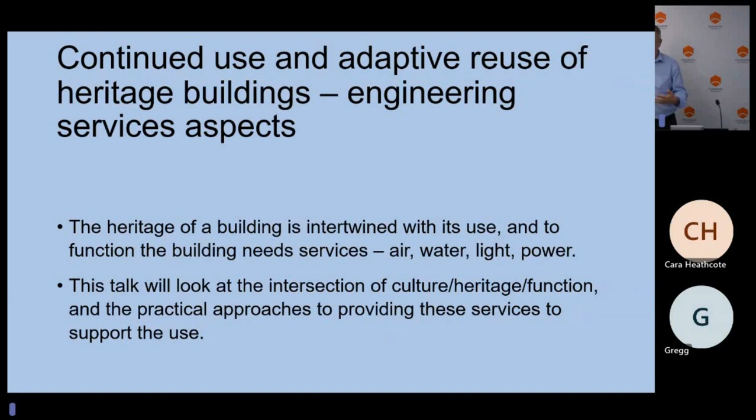So as I said, human use is connected to culture. So when you use a building, the use of that building—how you use it and what you use it for—is an expression of your culture. And I'll give some examples of how that works.

As I've mentioned, heritage is about aesthetics as well, and something is beautiful, but that beauty is part of its use, in fact. And then finally, and very importantly, heritage has got a lot to tell us about sustainability.

Some obvious cases of it: in terms of sustaining an object with its embedded carbon and its value, you keep that operating for longer periods of time. But also, heritage buildings tell us a lot about how to build environments that do last for hundreds of years. So there's some important lessons there.

In terms of some of the engineering approaches—and architects as well, I'm sure, have the same thinking—when you're trying to look at a building and sustaining its function, there's some fundamental approaches.

Number one is do nothing. And that sounds a bit ironic, but people knew how to build buildings, right? Buildings have been built for thousands of years. They are capable of their function. They have ventilation, even if there's no fans. They have light, they have water. So these things are fundamental. So often you can work with those things and do nothing and live with the outcomes.

But sometimes you want to add amenity to a building, to add to its function, to allow it to be reused in more modern ways, or ways that will extend its lifespan. So you try to hide things, and I'll give you some examples of that.

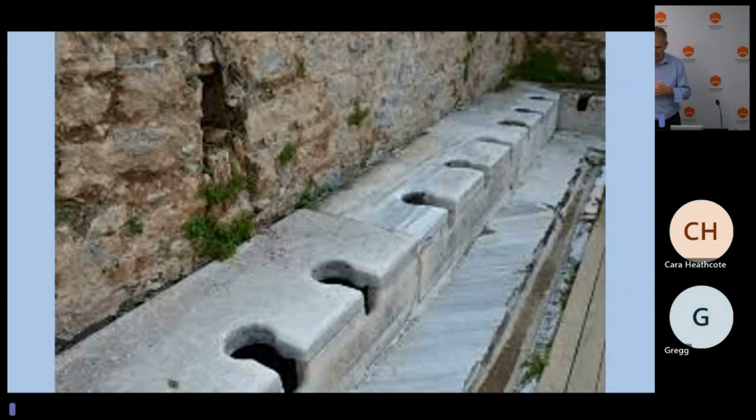So in the 'do nothing' camp, that's a Roman ruin at Ephesus. I wasn't involved in that project before my time, but it illustrates that people knew how to build buildings. The fundamentals of how buildings get used don't really change, though the aesthetics might be a bit different.

One of the key building services is hydraulics, or plumbing as it's more commonly known. The essence and fundamental physical properties of plumbing go back before the Romans, but the Romans made great advances in it. The technology and principles, if you look at some of the pipe work, are still there today. Hydraulics is probably much more of an art than a science, because it uses those physical properties and rules of thumb that have evolved as the craft evolved.

But obviously some structures don't have the ability to have the amenities that you might want in that facility, so those amenities can be tacked on. I'm sure you've seen examples of this—churches are a classic example where you have the amenity block out the back. So you sometimes have to tack things on to provide the amenity you want.

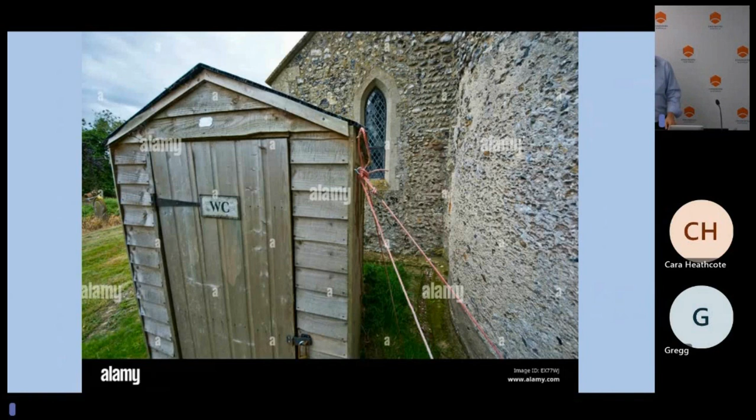So what did we do here? We put in air conditioning. The beauty of what we do, a lot of it, is nobody can see it, nobody can hear it, nobody can feel it. If we've done a good job, nobody knows it's even there. That can be frustrating sometimes, but it is a great success.

Again, I talked about do nothing. This building, in fact, was a huge thermal mass, so even in a tropical country like Thailand it actually maintained very stable conditions. If you have a diurnal cycle of temperature in a large thermal mass building, the temperature tends to remain at that average constant. So to air condition it was about just trickling in a small amount of air conditioning—we were able to maintain quite comfortable conditions so the people in their fancy uniforms wouldn't get too sweaty. Obviously it wasn't 22 degrees plus or minus 0.5, which is my point—we can live with conditions that aren't necessarily what we'd have to do in a new building.

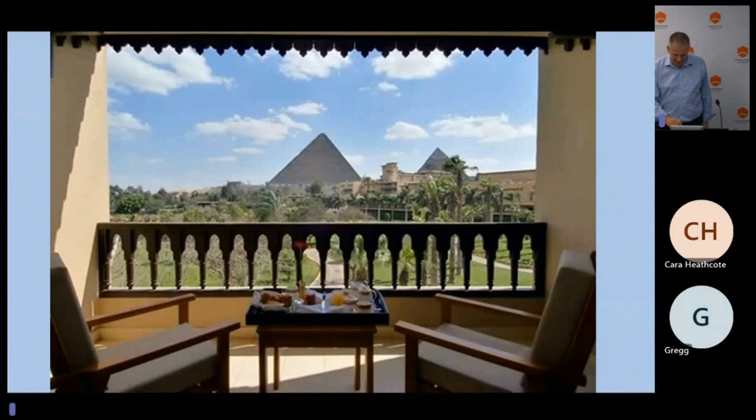This is another example of hiding. This was a royal hunting lodge in Egypt, now the Mena House Hotel, a very nice hotel with obvious views of the pyramids. In doing restoration work or adding modern amenities into a building like that, we had to reticulate power, we had to reticulate water, chill water for the cooling, and all those sorts of things. Where can we put those sort of amenities running around in a building? You can just see in the background what the facade of the building looks like.

Again, the answer here was—you'll see that wooden balustrade, underneath that's a masonry structure. Within that masonry structure, you wouldn't believe what we managed to squeeze in. All of that contained a lot of the main power reticulation, and water reticulation actually ran along inside, because that was an element that we could touch. It was not original heritage—it was stuff being reconstructed as part of the hotel works. The building had been a hotel for many, many years, but this was a restoration, trying to bring it back to a more sympathetic arrangement.

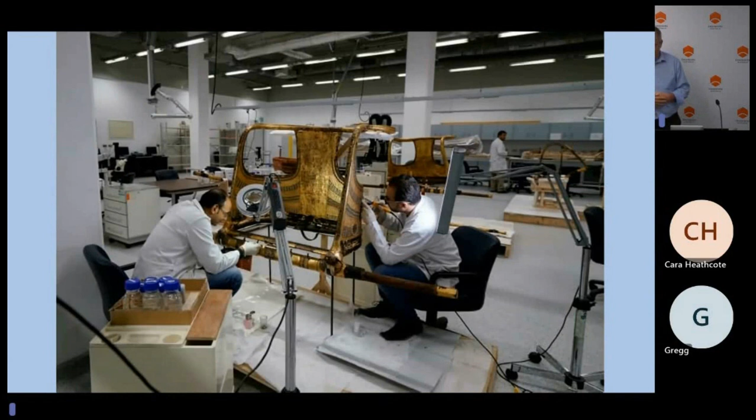Slight segue to another project I was involved in, talking about Egypt. This was about 15 years ago, I calculated, that I started working on this project. I left after only a few years on it. I did check the website - it's not finished yet. These things take time, and it was a huge exercise.

The Grand Egyptian Museum is one of the largest museums in the world. It has a ridiculously huge amount of artefacts. In the old museum, the artefacts that had been discovered were then lost because they all went into the basement - some were literally buried because the weight of other activities had pushed them back into the ground.

So the new museum is under construction. The first stage was to build facilities for restoring and storing the antiquities. The design life for this building was multiple hundreds of years - I can't remember exactly how many. That was a very powerful message, to think in those terms, because the people who built buildings hundreds of years ago probably didn't have a design life criteria. But when you do have one, it really makes you think about what you have to do to make a building last for hundreds of years.

And that's the sustainability overlay. So how do you preserve antiquities? Well, you bury them, right? This building was buried under the ground near the pyramids where the new museum was going to be. It didn't need air conditioning - the little ventilation it had came in through a labyrinth system through the earth to be cooled down. Certain areas did have air conditioning, but that was the general principle: very little mechanical ventilation and no cooling.

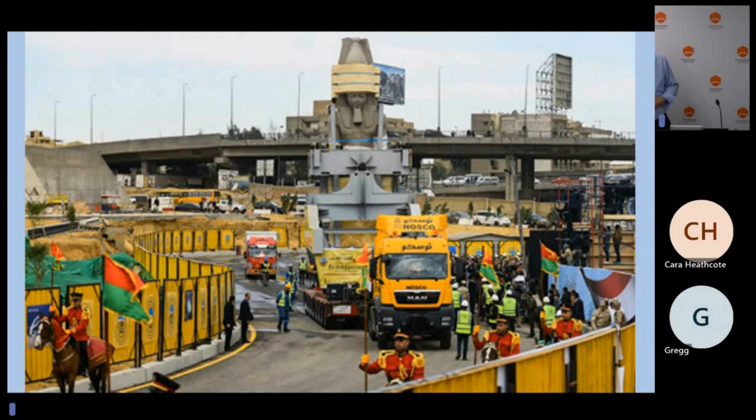As some of us have mentioned, to understand a building and work out how you preserve it, you really have to dig into its bones and understand its history. So the chap showing me around the railway station said, 'Do you want to look at sub-basement level 1 or whatever it was?' I said, 'I don't see that on my plan, so it doesn't exist.' He said, 'Yes, it does.' So he unlocked a door that said no entry, confined space.

I shouldn't say that, but anyway, we went down the stairs. Yeah, Chatham House rules, yeah.

Went down the stairs and there was this refrigeration plant from the early 1920s, which was established to provide cooling for the fruit and vegetables and the freight going through the railway station. To my knowledge, it's still there — a coal-fired refrigeration compressor sitting in the basement.

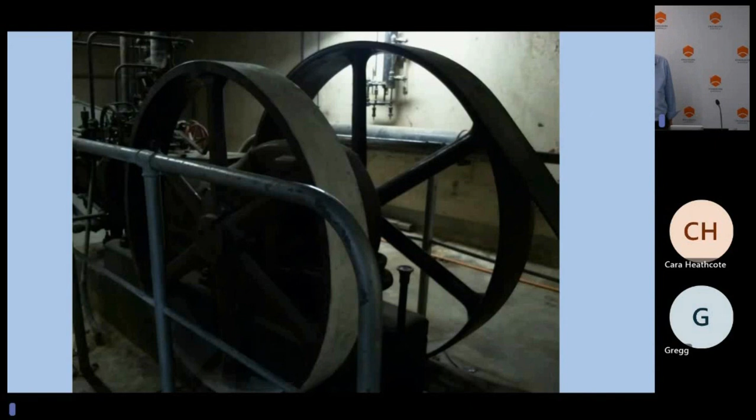Those fans are still there. They've been moved around a bit, but largely they're there, and the ducts are still there too. Obviously, it's been modified and changed.

Now, the lesson here is about understanding the culture and history of a project. When this project happened, the rail line said, 'If you're going to build above us, we need to keep operating — you need to provide fans because we need this to operate.' So the developer on top had the problem of the fans, that was their problem, right? That thinking and mentality is still there today, and those issues are still being unpacked.

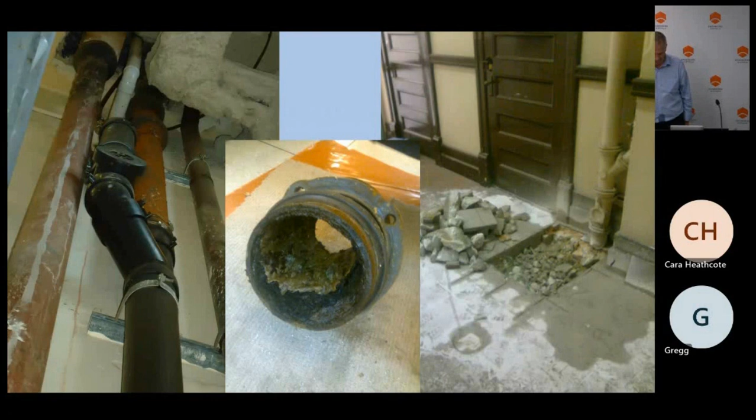The other interesting thing about theatres is they have a certain form because that's their function, right? There's the entry foyer, the rake seating, the stage — which are remarkably large when you actually get on them and see how they work — and there's the backstage.

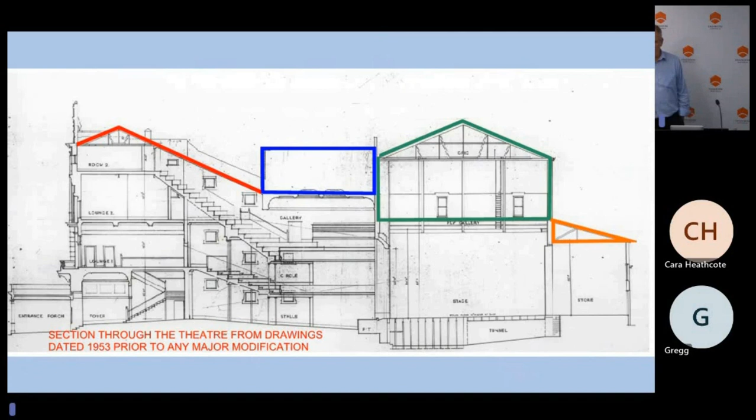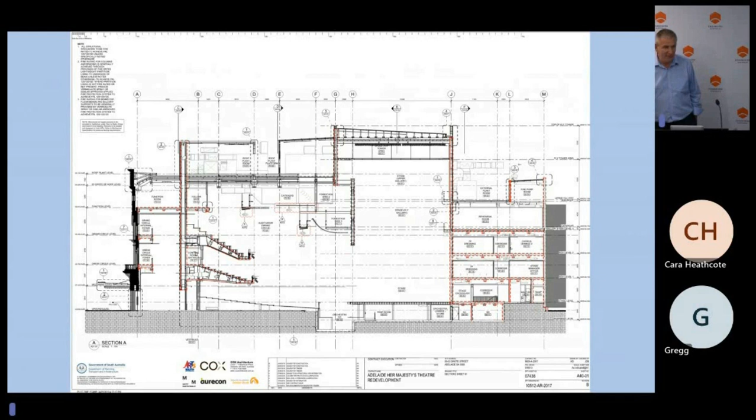So to make this work as a modern theatre, a lot of things had to happen. The seating had to be improved, the staging had to be improved, the backstage area had to be radically changed. So what was kept? Well, that front facade was kept, and the eastern facade was kept, as you can see in that grey area, and pretty much everything else went.

But what was the choice? Before this project, we were involved in the HMT about 5 or 10 years before that, and it was at the point where it could no longer function. The fire brigade was saying this is unsafe, you cannot put 1,200 people in this building. It's got wood, it's got no fire protection, lots of things wrong with it. So we did various upgrades to keep it going, but for it to have an economic life, it needed to be relifed so it could operate.

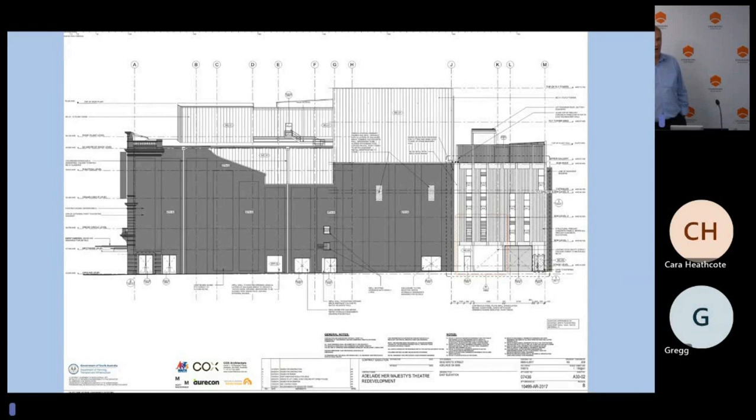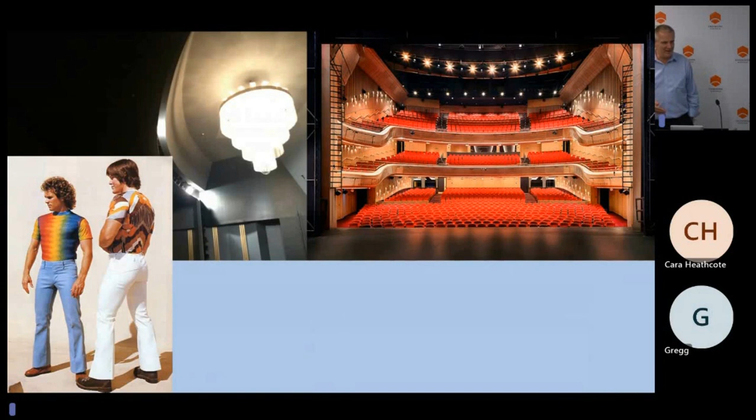There's probably all sorts of different opinions on whether that's the right or wrong thing to do, but it can be done in an empathetic way so the life and culture of it is still there. The interiors still look and feel like the interiors, unlike the 1970s overlay that was there before, because it had its original look and feel. It had been changed and modified to a different aesthetic, one we probably don't appreciate anymore. And now it's been brought back to that aesthetic.

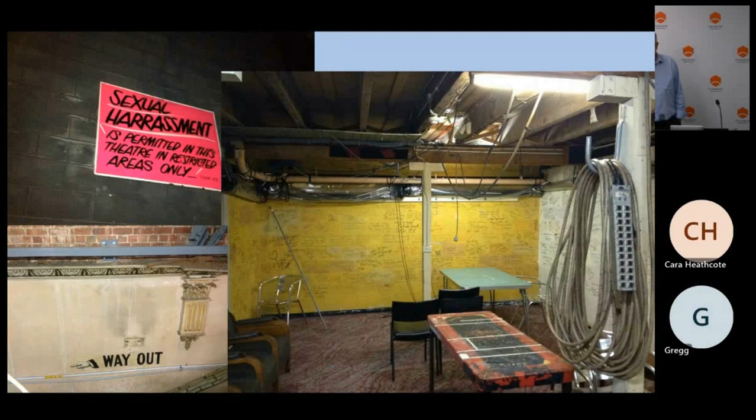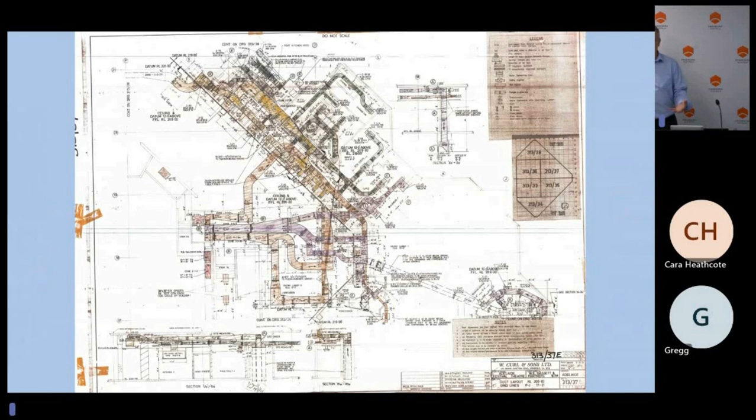This is another example from Adelaide Festival Centre, where again you see why a theatre looks like it does and what the shape of it is like. From an engineering point of view, physically going down to the bowels of the building, opening up the plan drawer and ruffling through all the drawings to find these hand-drawn 1970s drawings was a fascinating and important experience. You actually have to do that to understand how the building worked so you can sustain it. Again, a bit of building management system there, which is always good to see.

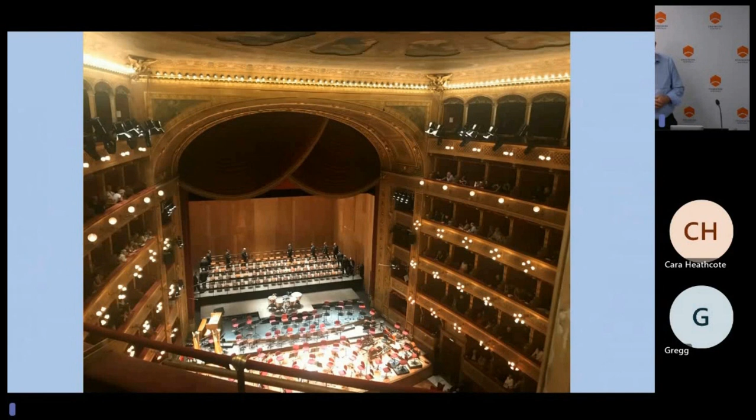While I was doing that project, I was fortunate enough to be travelling in Palermo in Italy. We went to the Opera Theatre, a magnificent building. You'll see at the top there those segments in the roof. Originally, and unfortunately still doesn't work, they would open up so you could actually open that roof and get natural ventilation through the building. So they knew how to build buildings in the 1800s and earlier, and buildings didn't have air conditioning. I'm an air conditioning engineer, but I always promote not having it if you can avoid it.

The other story with that is the fire protection, which consisted of Italian firemen standing on every level at the fire exit, because the egress arrangements are a bit ordinary, but that was their solution, right? They had firemen there when there was a big event. So I don't know how they pay the firemen - maybe the firemen liked opera, I don't know, but that's how it worked.

How am I going for time? Am I going well? Okay, good. Thanks, David. The time has stopped working.

So I'd like to finish off with this project, which is the REPAT Health Precinct. A lot of you would know it or heard of it. It started its life in the 1940s. We look at the war in Ukraine and understand how terrible war is, but it's very hard to imagine what it would have been like living in Australia when our country was at war and our folk were heading off to war. So the government said we need to repatriate these soldiers - that's the term. When they come back home, we have to take care of them. They have mental and physical damage from being at war, and it's an obligation to do it. So as an emergency crisis response, they built these repatriation hospitals all around Australia, one of which was at Daw Park.

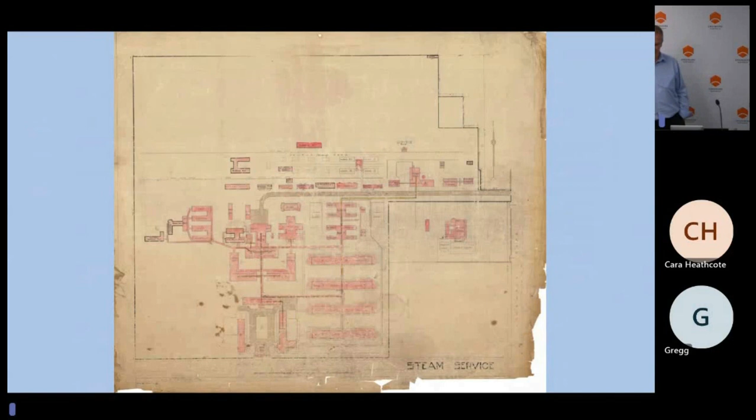So that picture shows the steam system. It was a central hospital system with all the central utilities. That's what the site looked like at the time. Again, physically touching and feeling those drawings as part of research, and necessary research, not just historical interest, but actually needing to understand things. Seeing those drawings from the 40s was amazing.

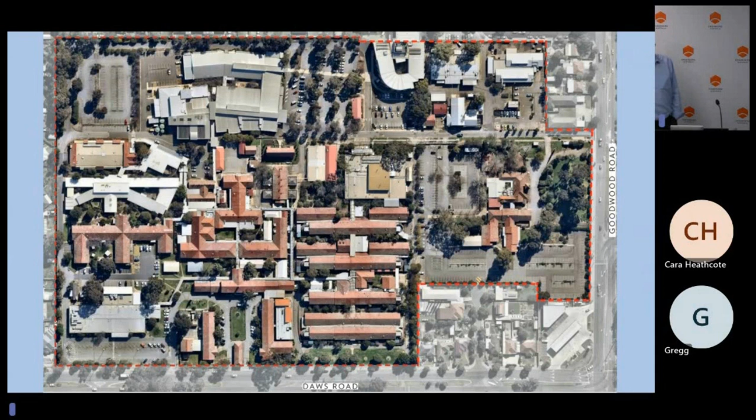And as an engineer, you'd put your hand up and say, yep, it'll cost a fortune to fix this, doesn't make any sense, right? But because of that protest we talked about, it had to be rethought, and it's been reborn as what's now called a health precinct. So rather than having all those central services and central facilities of a hospital site, it's now individual health services, each with their own independent identity, but all linked together by those themes of repatriation, physical rehabilitation, mental health. All of those themes are still there.

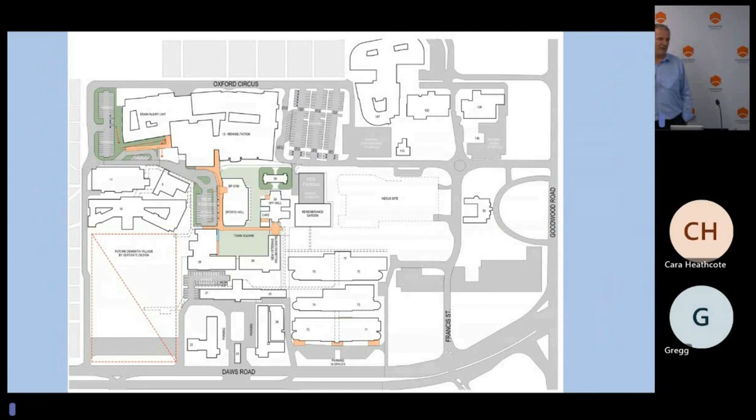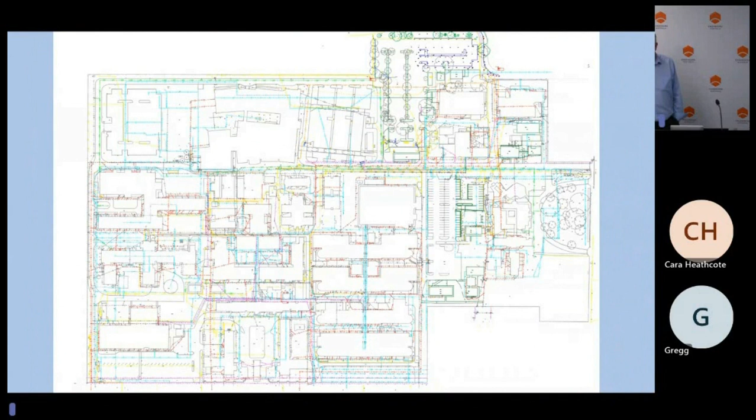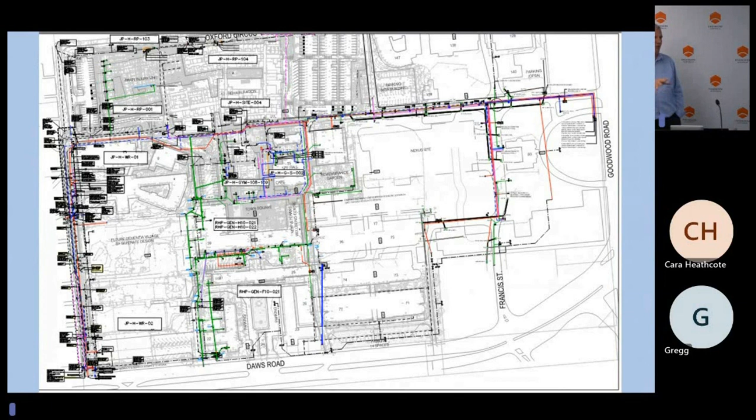From the services point of view, we had to have a look at what was there, the mess that was created over the years, and then turn that into something logical. So that's kind of the engineering part of it. But that work had to be informed by A, the old heritage of how it was built, and B, what was the cultural necessity and why was this thing being set up?

And always reminding ourselves that we're dealing with people, young men unfortunately, brain and spinal injury, which is one of the key wards on site. The key cohort is young men, because they're often the people who have those sorts of injuries. And they're very similar type people in my mind as some of the people who were in there in the 40s.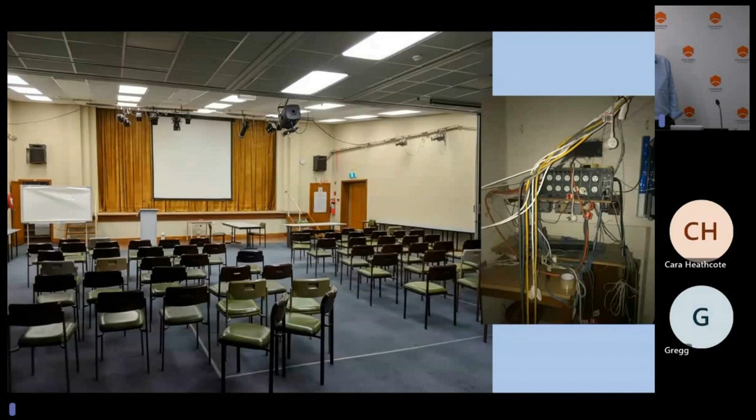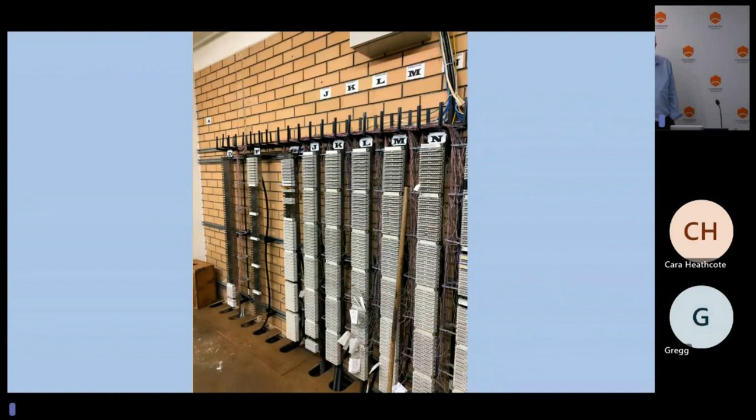People need to have air conditioning. We sized it based on what's the biggest thing we could put in there, and that'll do. The interior space with its 1970s overlay, which we all love, now has a much more sympathetic and desirable location. More engineering stuff that I won't talk about. Communications, it's still there from back in the day. But the fundamental outcome was a space that has maintained its heritage.

So on the 11th of the 11th last year, it was the 50th anniversary of something. Can't remember its founding. Oh, it probably was its founding, yes.

And it was also sort of a milestone on the project. So we had the usual ceremonials. You had the last post, you had the bagpipes played by the architect of the project. You had the RAAF flyover, you had the minister's speech, you had the prayers, all those things. And of course you had the

Indigenous Welcome to Country ceremony. And the guy who gave that speech, I thought really turned things around in an interesting way, because he talked about Aboriginals' connection to land. We've heard that many times and we understand it, and well, we hope to understand it, and we appreciate it. But he actually then flipped it around and said, this is your people, your families' connection to this piece of land, because there was all sorts of people there. There was Vietnam vets, there was all sorts of people, and people had dedicated their lives medically to these sorts of facilities. He said, this is your place, this is your connection to your land. And I was pleased to have been a part of restoring that and bringing it back to life.

So that's about that connection piece. And I'll leave it at that, David. Thank you.